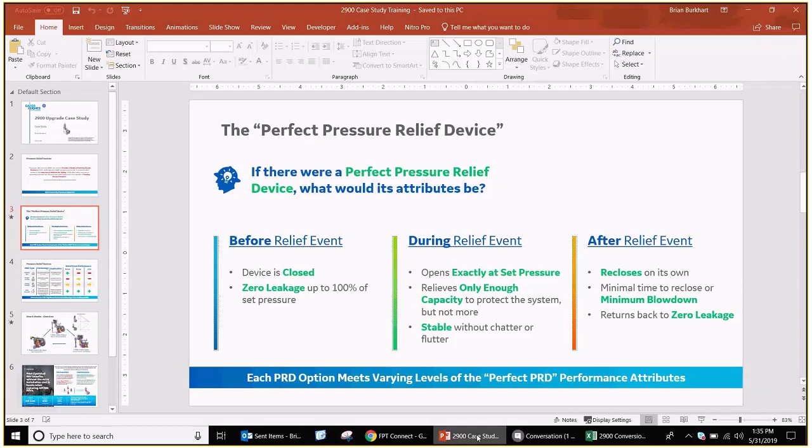My name is Brian Burkhart and I am the product line manager for the consolidated pilot valves. For this session, I'll be walking you through about a 30-minute presentation on the consolidated 2900 pilot valve and a case study where you can actually upgrade or replace API 526 direct spring valves with the pilot valve, and the benefits associated for the customer with this application. So with that, I'm going to go ahead and get started.

But before we go straight to the case study, I'd like to start you off with just a little bit of background and put this into context, how the pilot valve and specifically the 2900 fits into the application. So if we look at the National Board, who's the governing body for pressure relief devices that are protecting systems from overpressure events, they define a pressure relief device, or a PRD, as a device that provides a

means of venting excess pressure, which could rupture a boiler or pressure vessel. A pressure relief device is the last line of defense for safety. If all other safety devices or operating controls fail, the pressure relief device must be capable of venting excess pressure. So essentially, when there's this unexpected rise in pressure beyond what's safe for the boiler or the vessel, the pressure relief device is intended to open and relieve that pressure and protect life, property, and equipment that it's protecting.

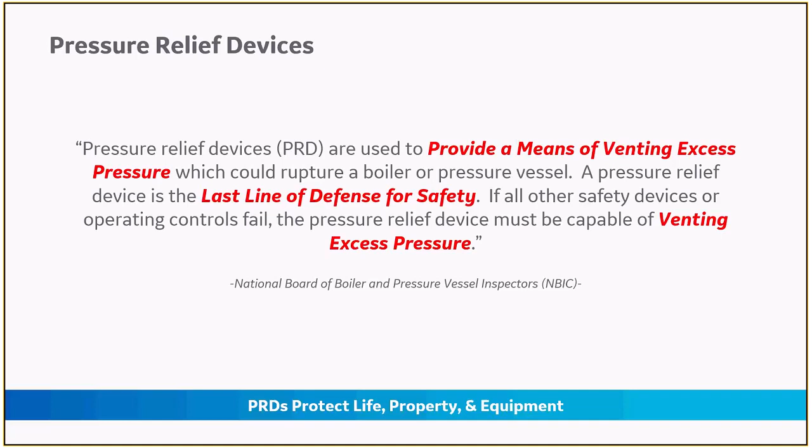Now, there's lots of different types of pressure relief devices, and so if we put ourselves in the shoes of a customer, what are they looking for in a pressure relief device? Or more specifically, if there were a perfect pressure relief device, what exactly would that look like? What would its attributes be?

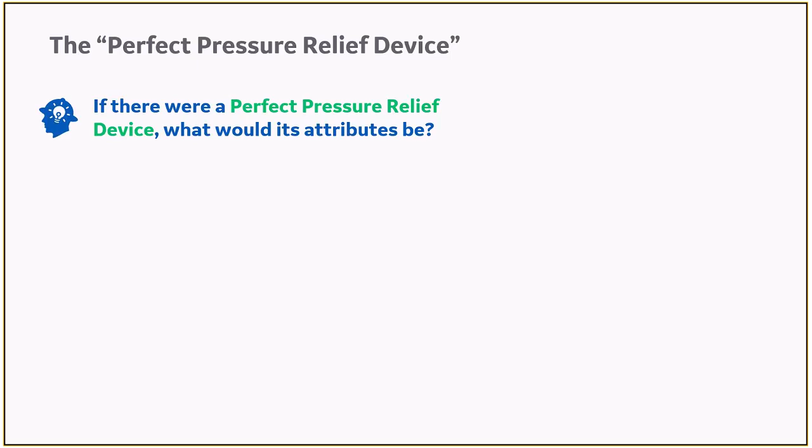What we do is we break this down into three different phases. The first phase is before the relief event happens, and this is the phase in which most pressure relief devices are spending the majority of their time. At this phase, the pressure is at a normal level, and we want that device to be closed. If it were to be open when it's not needed, it would be flowing capacity and wasting process for a customer. Sure, it would be protecting their system, but it would have this side effect of wasting process and therefore costing money to the customer.

Secondly, not only do we want it to be closed, but we want it to not be leaking. Ideally, we want it to have zero leakage, all the way up to 100% of set pressure. Set pressure is the pressure at which the device is intended to open and relieve the pressure. Typically, the relief devices are set somewhere around the MAWP, which is the maximum allowable working pressure of the boiler or the vessel that they are protecting. So we'd like to have zero leakage so that the customer isn't losing that unwanted process through the relief device.

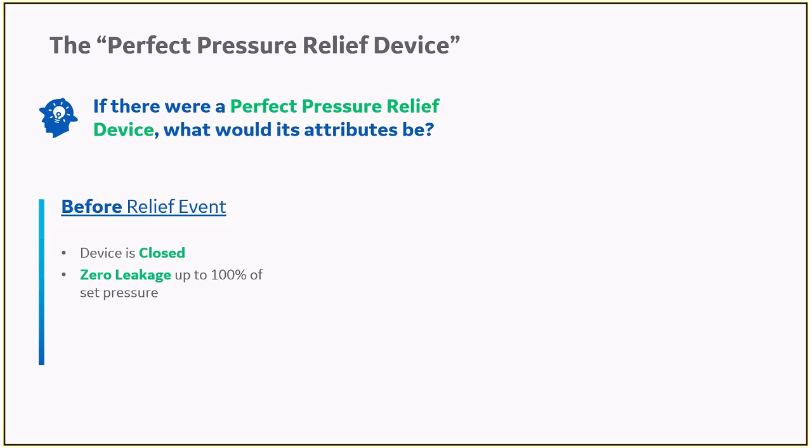Secondly, the device is intended to open and protect the system whenever that overpressure event occurs. So when that happens during the relief event, we want our device to open exactly when it's supposed to. If the relief device doesn't open, then it's not protecting the system. Now if it opens early or at too low of a pressure, we are wasting process. Maybe we're having some leakage, or maybe it just opens too soon and it didn't actually need to open to protect the system, and we waste some process there, costing the customer money.

Now, we also don't want it opening too late, or the overpressure could be so much that it could damage the valve or the system. So we want it to open exactly when it reaches set pressure.

Secondly, not only do we want it to open when it's supposed to, but we want it to flow how much it's supposed to. We define that in terms of capacity. We want it to relieve enough capacity to protect the system, but not more than is required, because again, that would be wasted process for the customer. And if the device did not flow enough capacity to protect the system, then of course the overpressure would overcome the device's relief capacity, and it could still cause damage to the system.

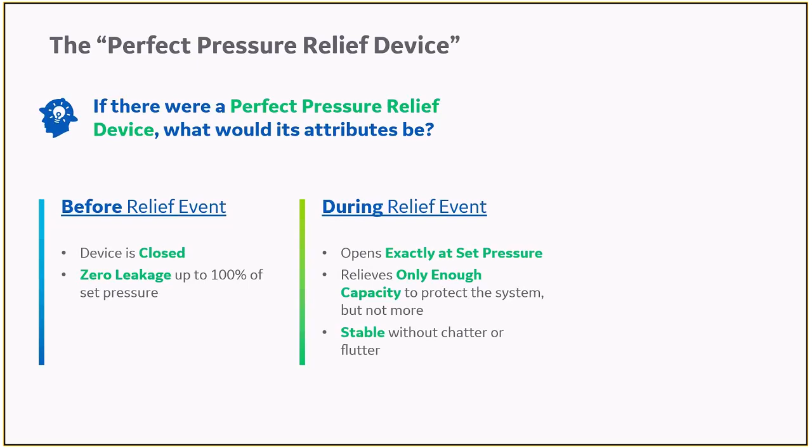So it's certainly important that the valve opens and flows in a stable manner. Once the system pressure normalizes and comes back down, we want that device to reclose on its own. In a perfect world, we don't want to have to manually close that device, replace it, or hit it with a hammer to get it to close back down. We want it to close back down all by itself after the relief event. And we want the time between when it reaches full rated capacity and when it closes back down to be as minimal as possible. We call this minimum blowdown.

Because if it takes too long to close, it's relieving more capacity than it needs to, and this can be wasteful. Finally, we want it to return back to its original state before the relief event, with zero leakage. So we want it to be closed and back to zero leakage. This is kind of a circular cycle that we want to see the device doing.

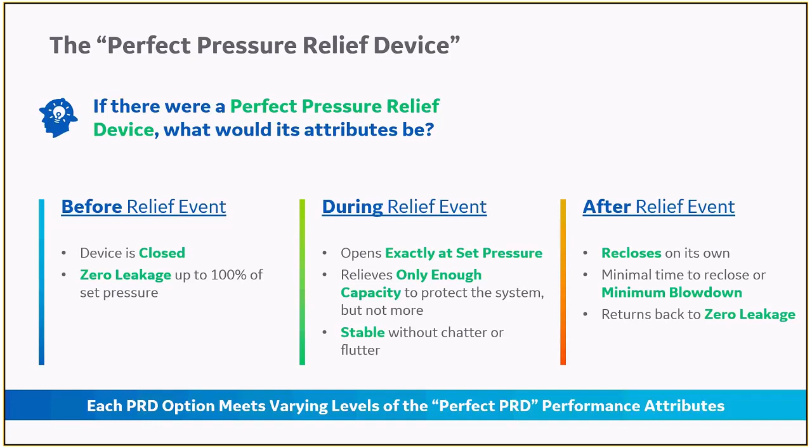When it comes to pressure relief devices, the customer has many different options, and some options are better for particular applications. There's kind of commercial effects to this too, in terms of pricing, lead time, and all that. But if we look from a pure technical standpoint at the function of these different devices, and weigh that against the three criteria we outlined before, this table shows you four of the most common pressure relief devices and how they line up to those three criteria.

We start with the rupture disc. The rupture disc is essentially a non-reclosing piece of metal designed to burst at a particular set pressure. Before it opens, the rupture disc is great - there's zero leakage across it, and it's closed, so we give it a plus. However, during a relief event, the rupture disc bursts open and continues to flow until you've isolated it. This means you can have unwanted process loss - it's going to continue to flow, flowing more capacity than it needs, which can be a costly event for the customer. Finally, it's not going to reclose on its own, and it's not going to return to zero leakage, so we've got minuses in those categories.

Second, we look at a weight-loaded valve. A weight-loaded valve is exactly how it sounds - you've got a pallet of weights stacked against an inlet pressure. These are very popular on storage tanks, sometimes called breather vents. What they're really intended to do is let the tank breathe in and out throughout the day as the sun comes up and heats the tank, then goes back down and cools it. The weight-loaded relief device allows that tank to breathe in and out so it doesn't have an overpressure situation or pull a vacuum and suck itself in. Typically they'll blanket these tanks with an inert gas, because you get very poor seat tightness on a weight-loaded product. That's why we've got minuses before and after - the pressure acts up against those weights, and those weights aren't heavy enough to cause high seat tightness.

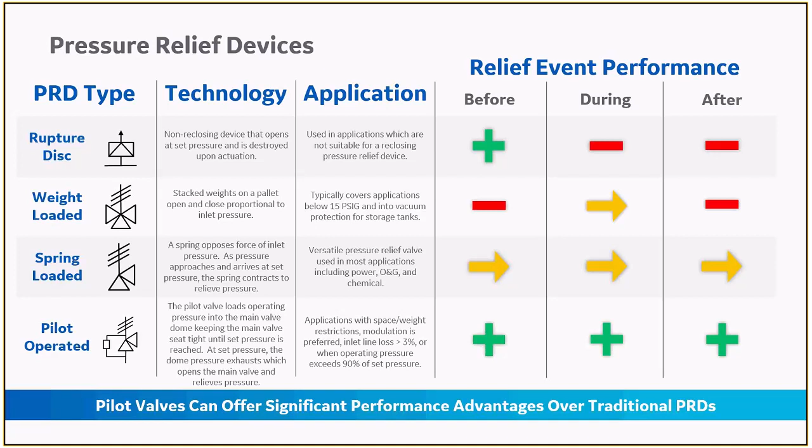A pilot valve is a great fit there. And really our motto here is let's put the right pressure relief device in the right application and make sure our customers are aware. Our job is to help educate them on that topic. Okay, so we made a lot of claims about the pilot valve and especially along the lines of seat tightness, some of which may be counterintuitive.

Now the pressure pushing up is exactly the same as the pressure pushing down. However, the surface area on top of the piston is around 30% larger than the surface area beneath the piston. So pressure pushing up, pressure pushing down, but a larger area means the force pushing down will be greater than the force pushing up. Actually, as the pressure increases, the seating force will get tighter and tighter. It works exactly inversely proportional to the spring valve, which I'll show you in a moment.

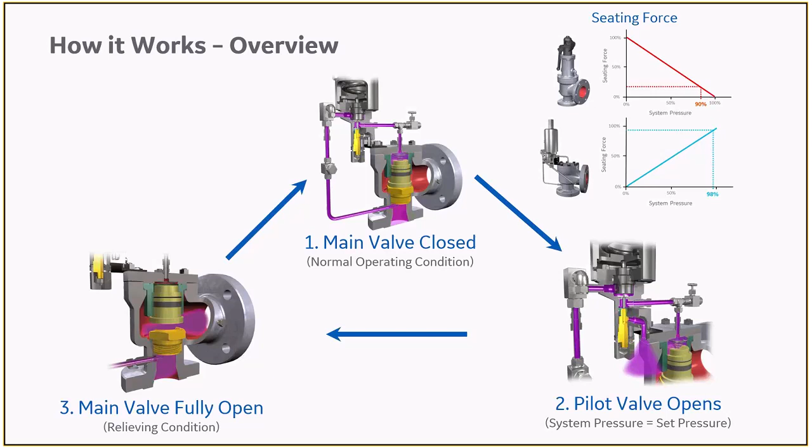This takes us all the way up to 98% of set pressure, at which point we will begin to see seat leakage across the main valve seat of the pilot valve. So this is really, from a technical perspective, how we achieve the greater seat tightness and get those benefits to the customer.

All right, so this brings us finally to our case study. And here our case study is, as you could kind of tell, basically what are those applications where a direct spring valve may have been spec'd in and installed, where a pilot valve could have been a better option for the customer, right? So we're talking about high inlet line losses that may be causing valve chatter.

Maybe they've got operating pressures at or above 90% of set pressure. Maybe their valve is oversized and it's causing valve chatter. Lots of different scenarios that we've discussed in this presentation so far.

Now, every manufacturer of a pressure relief valve, they all have pilot valves. They all generally can provide the same benefits that I outlined to you before, right? We can get greater seat tightness, we can eliminate valve chatter, we can have a modulating valve to just flow the required capacity. Pretty much everybody can provide that.

Now, we do have some technical advantages. We've got the best seat tightness in the industry at 98% and some things like that. But at that point, you're kind of getting into semantics and splitting hairs. So what is it that we have that nobody else can provide the customer to solve their challenge?

And that is in the consolidated 2900 series pilot valve, we have a valve that matches the center to face dimensions of the API 526 direct spring valves and gives all the benefits that we discussed with a pilot. So it's a pilot with the pilot benefits without the extra cost and hassle of having to do piping modification when you do an upgrade or a replacement.

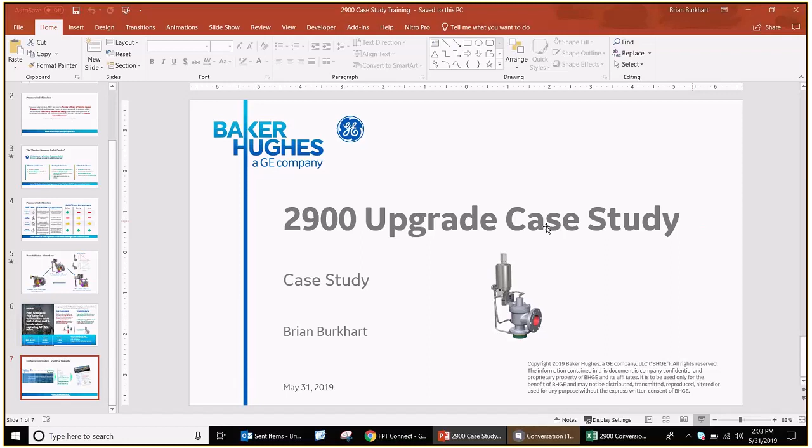You can go get the case study we covered today in a one-page PDF flyer format, all the same content I just shared with you, just in a different format presentation. You can print that out and send it to customers, however you like. That's all available there.

I also wanted to show you there's a new section in F&PT Connect. If you come to F&PT Connect and the Consolidated Aftermarket folder, there's a new folder down at the very bottom called the 2900 Pilot Valve Conversion Kit Program, and there's some useful information in here for you.

There's a 2900 conversion frequently asked questions document that will address some of your commercial questions, logistics, technical, all that good stuff. There's also a presentation that explains the 2900 conversion kits, the part numbers, the scope, the pricing, and some of the marketing material that's been released and will continue to be released to support this initiative.

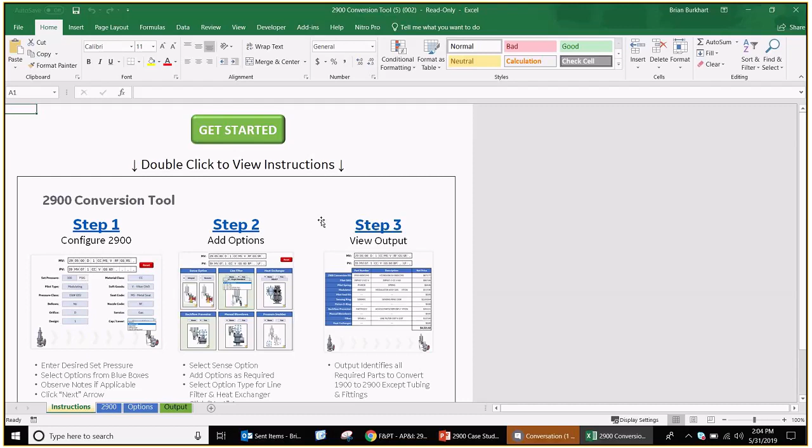And then there's what's called the 2900 conversion tool, and I'll quickly demo that for you here. In this tool, page 1, you'll see some instructions. If you double click this page, it'll open up a quick PowerPoint that shows you how to use the tool, but it's pretty intuitive.

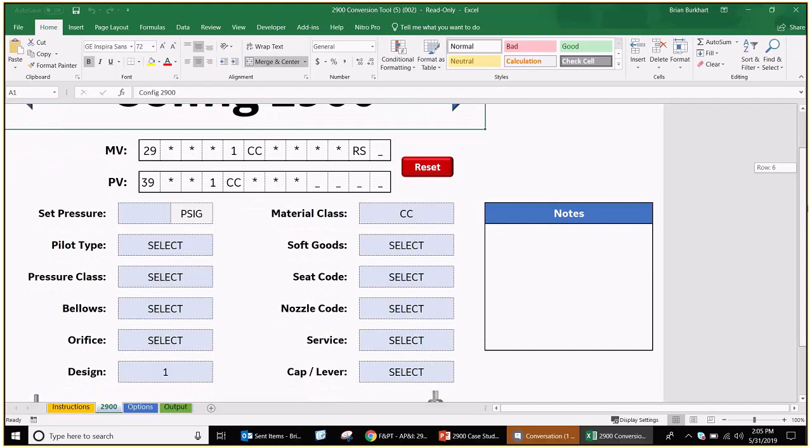If you just click on Get Started, you'll make your selections for the valve you want down here below. I'm going to do just a quick config for the sake of this presentation, but you can see you're going to enter in the set pressure.

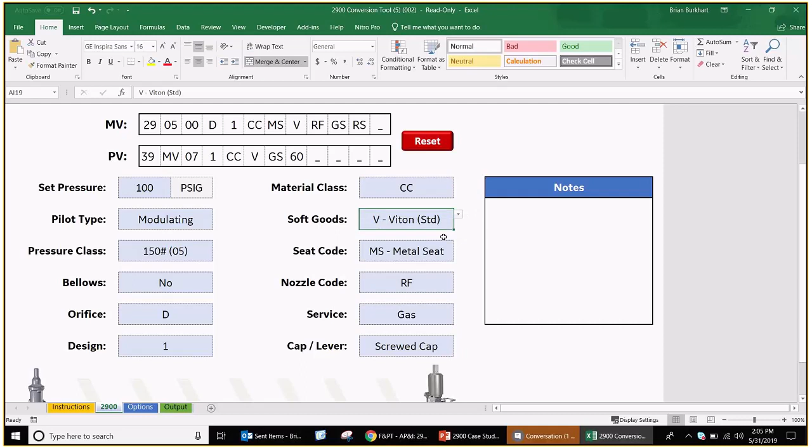And the pilot type - here I'll just change this one to modulating to give you an idea. Pressure class, materials, soft goods - let's say I wanted something besides Viton, let's say I wanted EPR for example. Pick whatever you like, then you click Next at the top.

Here you're going to select any options and accessories that you would want to add. Say you wanted to add a manual blowdown valve, or let's say you're not familiar with it or if you would need it - down in each corner of the accessories, I've got some help icons that will explain what that accessory is and why you may need it or want it. Here's a backflow preventer, inline filters, etc.

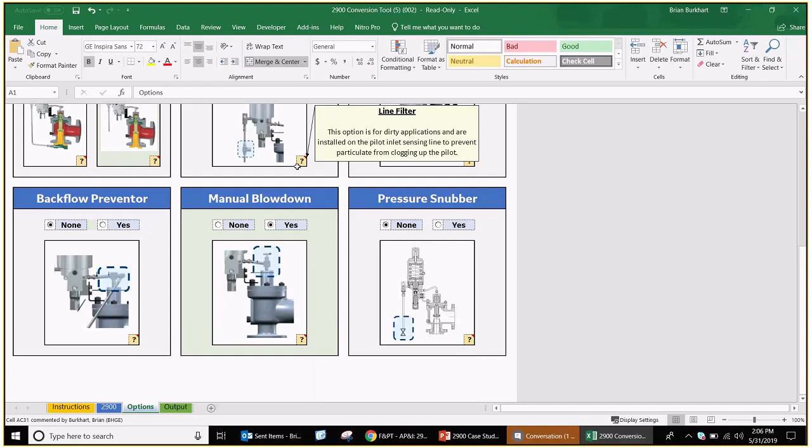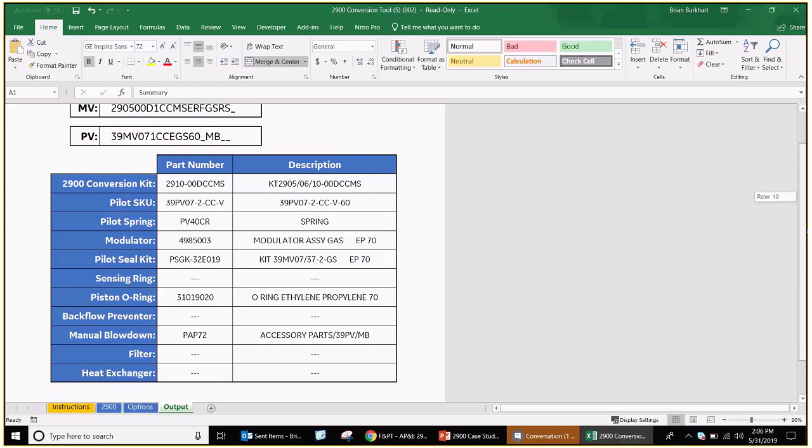So you can just say, yes, I want to add a manual blowdown valve. Then at the end, the tool will spit out all of the applicable part numbers based on the configuration you selected. I picked a pretty complicated one just to show you how it works, but I'll get a 2900 conversion kit, plus I need to add a pilot SKU, a pilot spring, and it'll pick the right spring based on the set pressure you entered on the first page.

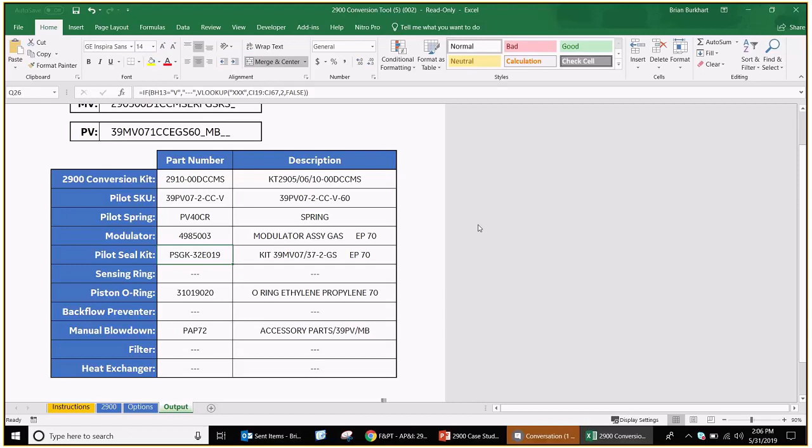I'll need to add a modulator because I wanted a modulating pilot. Here it's giving me a seal kit since I selected EPR instead of the standard Viton, and you get the idea.

This tool is intended to make it really quick and easy for you, after you convince the customer hey, you've got a direct spring valve in an application that could be better with a pilot valve, to be able to say, oh, and by the way, I've got all the part numbers we need to convert this 1900 to a 2900. Hopefully, ideally you have the conversion kits and pilot SKUs on the shelf, and you can just convert that valve real quick and easy for them.

So it's just as important to convince them and portray the benefits of the 2900 as it is to be easy to do business with. It's really a priority of ours that we make it easy for you to sell, so this is one of the tools to help you with that.